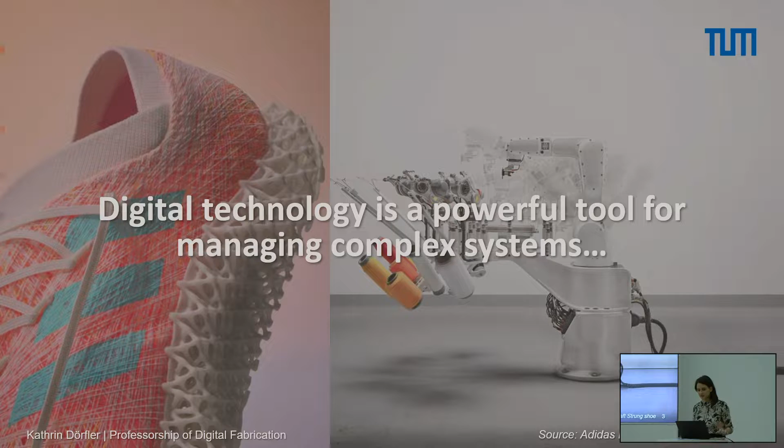So as you all know, digital technology is a powerful tool for managing complex systems. And in particular, the construction sector is often compared to other types of manufacturing industries, first and foremost the automotive sector or retail product sector. Often it is said that the production chain from design to final assembly is largely automated today, in contrast to construction. However, we believe that construction is not directly comparable to the classical manufacturing industries.

The built environment is intertwined with the material reality of the society, the geographic location to which it belongs, and it is a product of mostly its legal framework conditions, its regional availability and the supply chains, and also the industrial practices, skills, and technologies that are associated with it. So to enable a sustainable change in the construction industry, we need novel systemic approaches and also transformative technologies that come within the construction logics to become better and more sustainable.

So against this backdrop, this presentation and the work with my team advocates for this sort of holistic approach, emphasizing the need for digital construction that is somewhat robust and can withstand uncertainties, is in some sense also redundant and resilient to adapt to changing conditions. What I mean with this, I think it's best explained on behalf of a series of case studies, experimentations, and explorations. There will be 6 of them, so please be a bit patient. I will try to be in time.

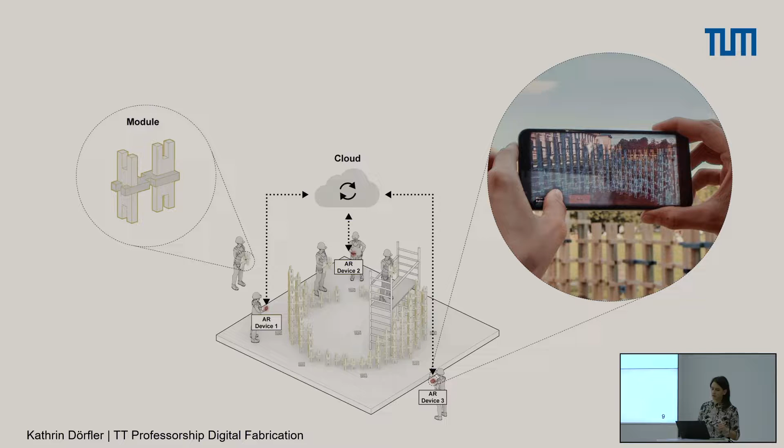And the research question revolves around how multiple participants or users can be synchronized and coordinated over a cloud, and how participants can intuitively log in, participate, and log out at any time of the process. For this, we developed a material system consisting of these discrete wooden blocks that offer form-fitting connections, and it makes it possible to use these units both as building blocks, as structural members, but also as sort of temporary support to build up the structure and then remove it again once the structure reaches sufficient

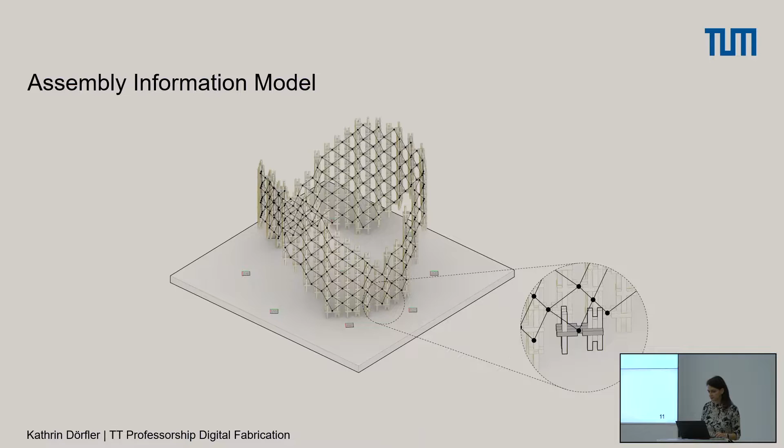stability. All of this is stored in an assembly information model, a graph data structure, where each of these blocks is represented by a node of the structure, but also by the topology, basically representing all the dependencies of these building blocks, and actually no sequences, but just dependencies. And this allows to continuously compute the states of other nodes according to the currently assigned states. I will explain this in a bit more detail.

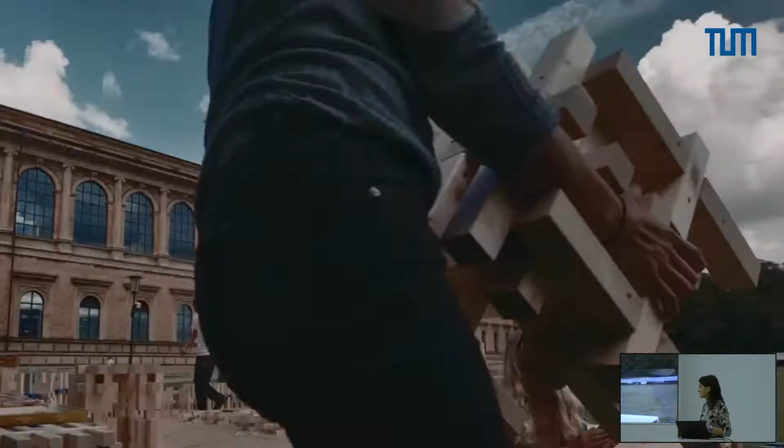So we built up this pavilion in front of the Pinakothek in Munich. This was during COVID time, so everything had to be sort of closed up. And you can see here the user interface, so it's all running on Unity on a mobile phone. And basically we had 4 of these phones, and each phone was used by a pair of students, so always 2 students that would work together. And one is basically holding the phone and talking to the other student, basically reading the instructions.

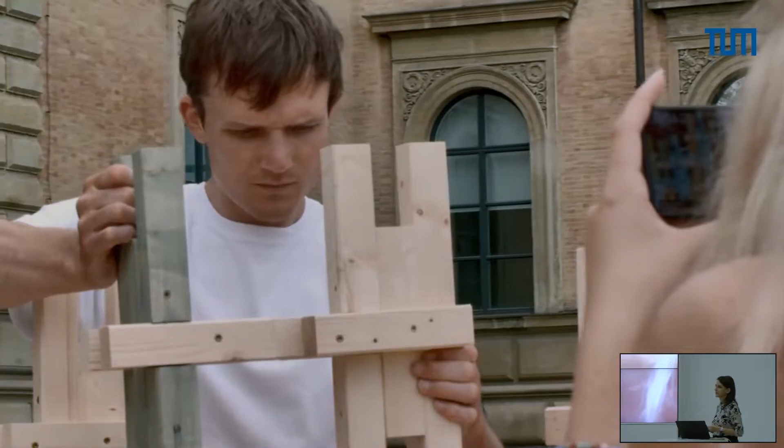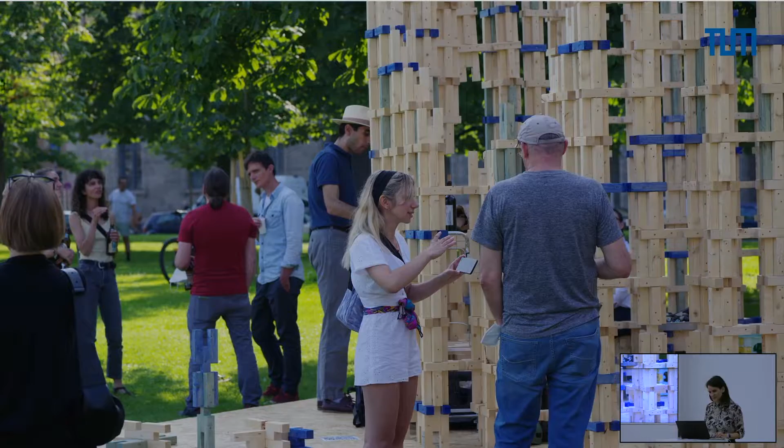You can see here that we use some sort of color coding, resembling whether an element can be built or should be built, whether one is selected by another participating user, or if it's removable, meaning that it can be removed again. And by this, we built up this pavilion as a sort of installation for this Kunstareal festival, and this is just the remaining building. The module itself is, of course, reusable, so there are no mechanical connectors, so we took it apart and rebuilt it at the Innenhof of our professorship. So these are some images from the installation.

And this work was, I mean, it's very simple, but it was still showing some directions what it means if multiple agents can participate together. And we try to expand this by bringing robots back into the system, so that we still work with mobile AR, but collaborating with collaborative robots. And this is a work that I have been developing with Daniela Mitterberger for a while already, and 2 of her MAS students this summer. Human-robot cooperative assembly of reconfigurable reciprocal frame structures.

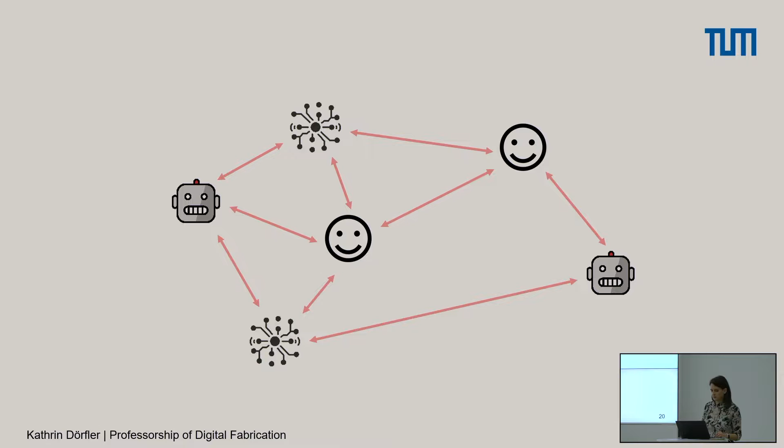It aims to foster collaborative ecosystems where humans and robots can complement each other, and tries to understand the limitations, but also the opportunities in human-robot collaboration, highlighting that this has to be considered in design, but also during fabrication. So we have seen exciting research that looked into multi-robot assembly and shows the effectiveness of collaboration among multiple agents, such that more can be accomplished than with just one participating agent. And the question is if also humans become part of these processes, if even more could be enabled. For instance, that we can take advantage of human cognitive abilities, versatility, fine motor skills, plus the robot's precision and endurance.

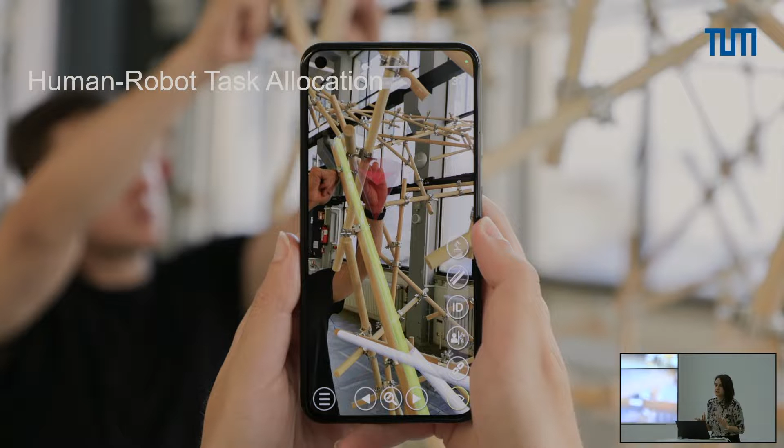We think this sort of thinking also has to be reflected in the design of the building structure. So we have to think, how can we meaningfully distribute tasks between humans and robots? Like, what can everybody do best, so that they can support each other in the best way? So this has to be considered during design, and then during building, of course, we have to find a way how these two entities can communicate with each other. So the mobile phone is always for us a way to visualize 3D data in 3D space at the correct time, at the correct place, and therefore allows to have a shared digital space that both humans and robots can share.

Again, in relation to this concept, we have basically developed some sort of assembly logics that would allow to examine this concept. And we have been building up on the basis of this reciprocal frame structure, where we always have modules of 3 that grow along a guiding surface.

During this growth algorithm, we already take into account - you can see here very lightly colored - the robot reachability, which should ensure fabricatability at each time, and the guiding surface, which basically also guides the growth algorithm. With this, we design already with the constraints, meaning the fabricatability is ensured at each step, so it's not a post-processing step but actually part of the design generation. The structural stability should also be ensured at all times.

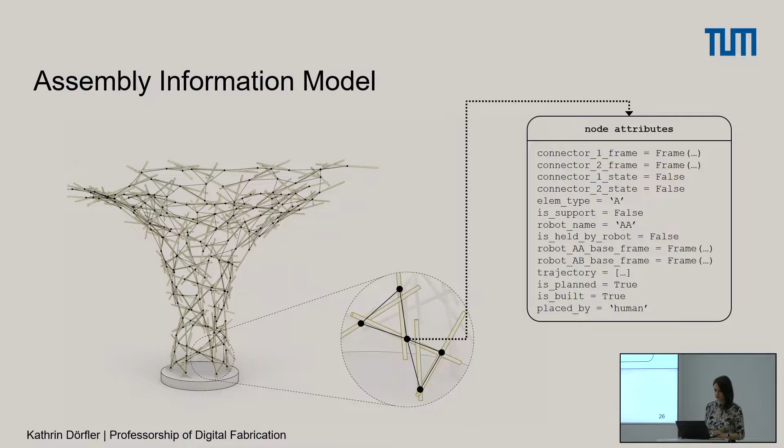Again, we work with this graph-based storing method, where the states, the geometry, the topology are stored in the model, allowing us to store all the fabrication data that is necessary, and also whether it's built by a person or by a robot, and all the data associated with it.

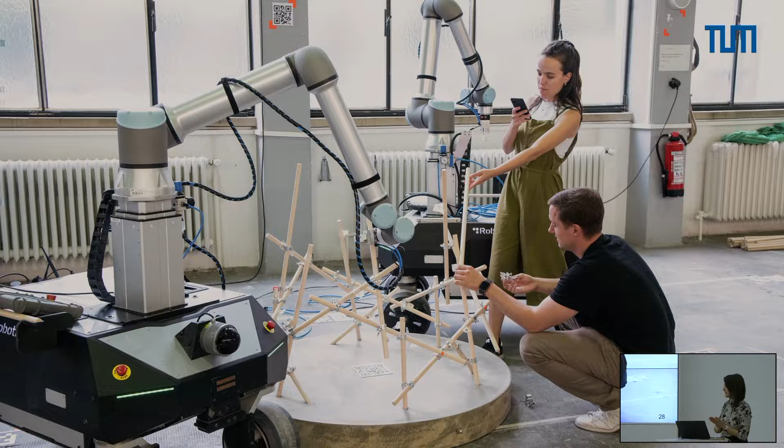Then Eleni and Joe joined by developing this nice AR interface. This was this summer, and I'll show you quickly a video that we tried to do, because it's always a bit difficult to communicate.

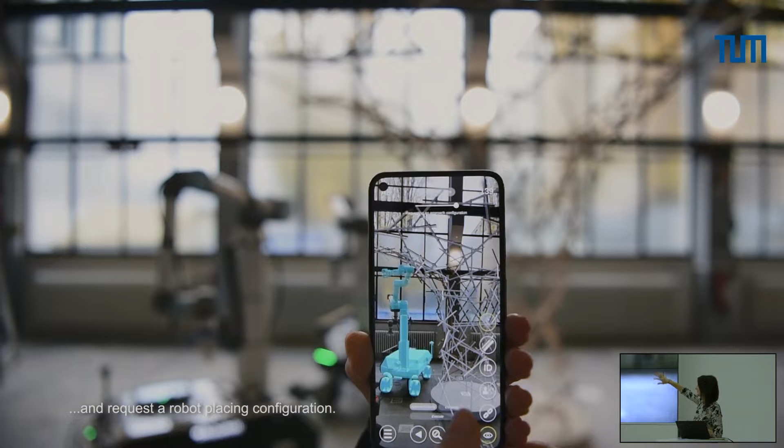This is basically the overlay of the AR app, and here you can see - you can hardly see, but - basically you select an element that needs to be built, and then you can trigger from the mobile phone the calculation of a trajectory for placing a new rod.

Then you can also visualize how this manipulation procedure is performed with this sliding you can see here, and then you can also trigger when the robot has to place the rod.

Once the robot has placed it, the person comes in and assembles the second rod, so it also has to follow some logic. While the first robot stabilizes the structure, the second continues - it's always like turn taking. The robot is basically also used as a temporary support, and then the second can continue.

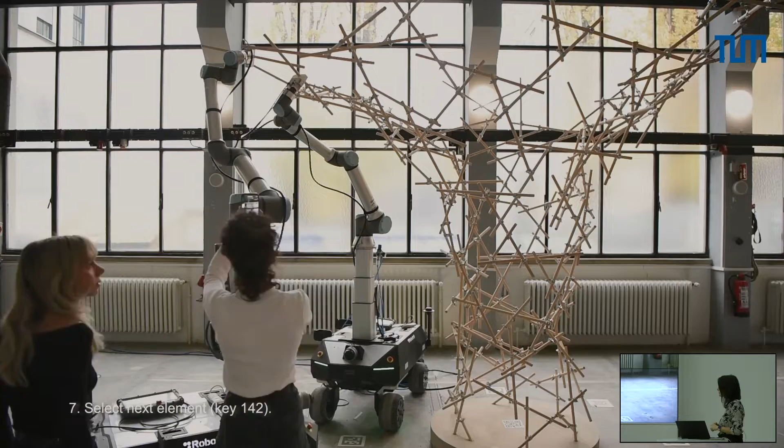You can see here also the interface. We have just worked with tags this time, so there's no object recognition.

And you can already see the limitations of this also - we would actually require much more spatial awareness in order to really make this very fluid and intuitive. The research we have been doing for a while, also together with Daniela, really shows that if we don't have the best spatial awareness, we will always have limitations in really making this kind of shared workspace very intuitive and seamless.

Now you can see when the robot lets go, the structure shakes because it's also a bit soft. Then in theory, the next rod could be assembled.

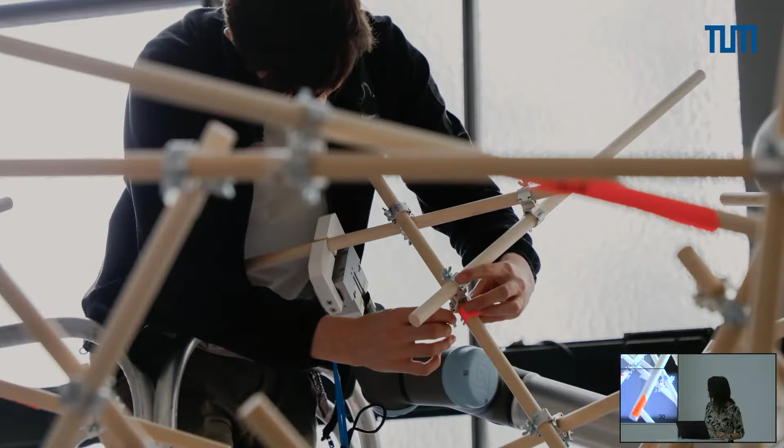So here are just some images. What is nice is that since the robot is collaborative, it really is used as a sort of smart drill - since we are working with these tools, it becomes very easily accessible to perform such tasks together.

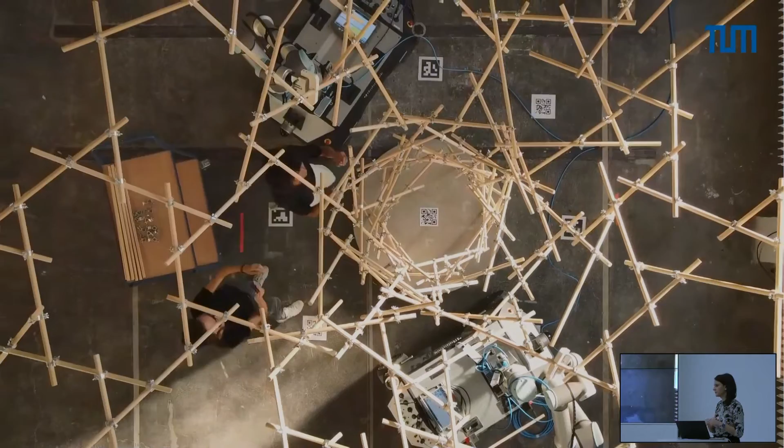This is just - I think Joe did the drone imaging, yeah, exactly - just to see a little bit also the scale. I forgot to say that all the nodes are the same, so this structure is completely reconfigurable, so we could disassemble it and assemble it again.

So this topic of spatial awareness keeps following us all the time. We have now initiated a collaboration with Professor Stefan Leutenegger on machine learning and robotics, to more fundamentally go into this topic of spatial awareness to support on-site construction or mobile construction. Spatial AI - big name - refers basically to the artificial intelligence that focuses on the understanding and utilization of spatial information with high precision, enabling robot systems to comprehend and interact with the physical environment in a manner that mimics human spatial awareness.

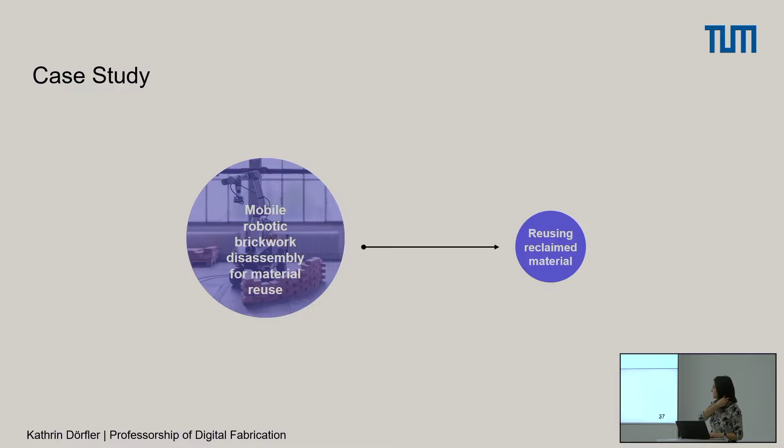And we have set up a case study with extremely simplified conditions, so no mortar, no additional complexities, let's say. But the objective was to realize an autonomous process for the robotic disassembly of a manually assembled brick wall with no CAD geometry and no prior knowledge.

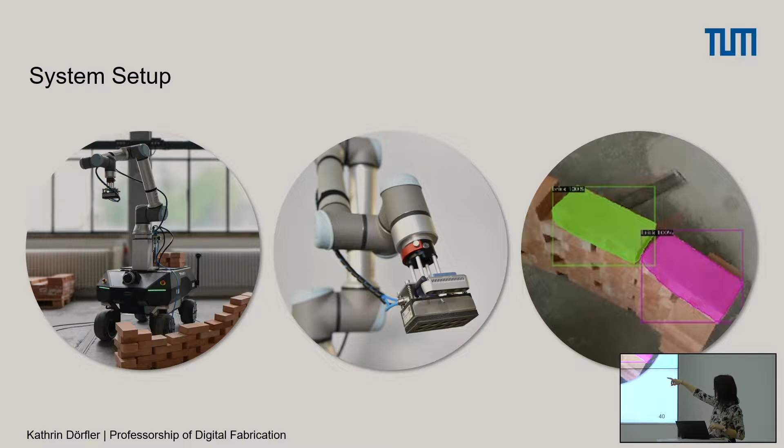We have started to train models with synthetic bricks, not real bricks, in a lot of different situations with a lot of different lighting conditions, such that both a full structure can be recognized, but also the individual objects within. And we've integrated this again into our mobile robot. You can see here the camera, stereo vision, and then what the robot can actually see.

And we have set up a two-step task management system. First, a search routine to identify the workpiece in general, and then an iterative loop to start to disassemble the whole system.

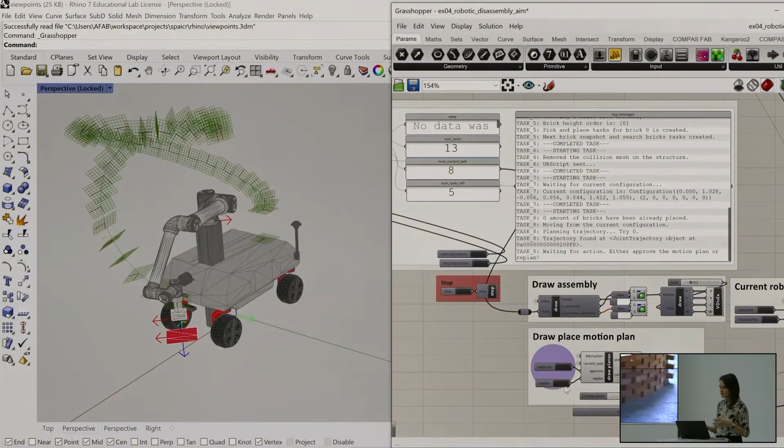And then we compare it to a digital model that we set up as the disassembly progresses. Each brick in reach, or each detected object in reach, is then taken off. So you can see here that the digital model is generated as the disassembly progresses.

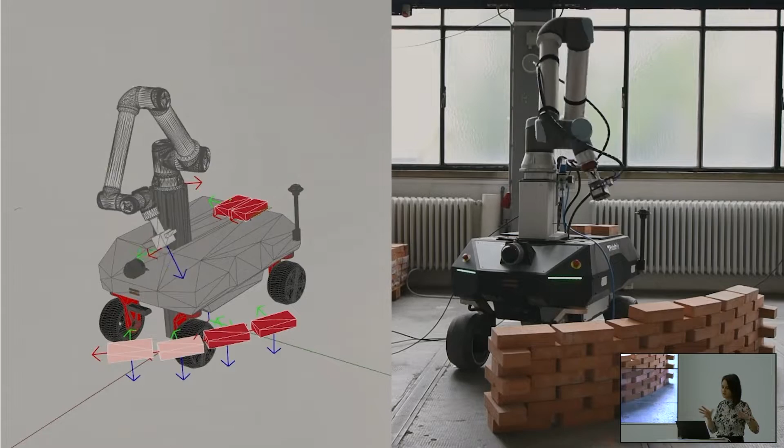And basically the routine is always the same. The robot looks at the structure, it takes one of the detected bricks, if there are multiple, plans the trajectory for putting it back on the storage, which we have now put on the back of the robot, and then continues with this routine until no more objects can be taken out.

And you can see here the digital twin, and this would be the first patch that it would disassemble. You can also see that it goes in the opposite way as you would do when building it up. So it goes patch-wise with these kind of trapezoidal shapes down.

Then we relocate the robot manually, so there's no autonomy in there, and we use a tag to put everything into the same workspace globally, because locally this information is not important. For the disassembly routine, this is not as important. So we go, in this case, 5 times to basically take this whole structure apart.

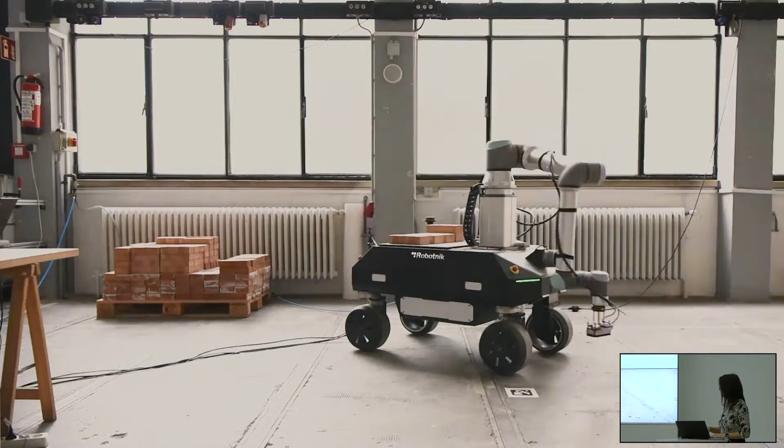And what is nice is that you create a digital model during the disassembly, and you could basically reconstruct it in the same way, which is somehow nice. Of course, not super accurate to the extent that would be required, but if we can tweak this, this would be a nice way to think also into reconstruction again.

You can see here the 5 patches. So while it's not super accurate, it's super robust somehow. We had 100% task success rate with these 48 bricks and 5 times relocating.

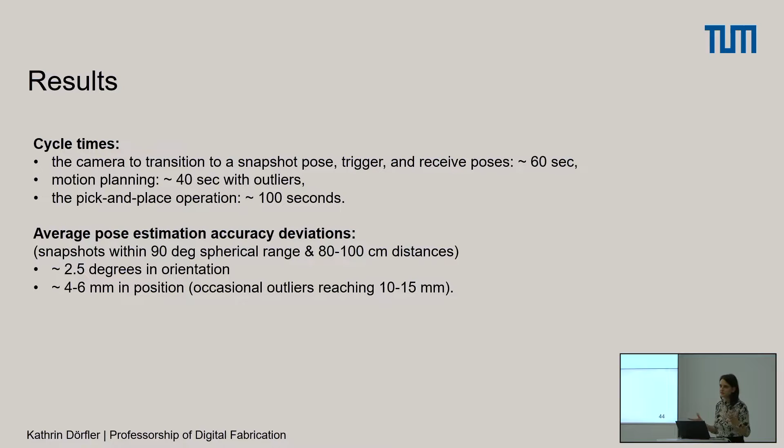Here are some of the numbers that quantify a little bit of the cycle times and the pose estimation of the single bricks. We would now need to measure it a bit more precisely to really make some better assumptions on the accuracy of what we can achieve.

So while we are very invested in developing these technologies, we are also very invested in working with architecture students and really bringing these technologies into the design sphere. And this is also very much connected to this additive manufacturing and construction cluster.

We have initiated 2 pilot projects in the last 2 years where we set up design studios where we work together with students on architectural design topics. The focus is on design, not only in terms of what is built, but also how the whole process is performed, leveraging additive manufacturing technologies as a design driver. In the classical way, you design, then you engineer, then you construct, but we try to see this in a coherent, early stage design that brings all these topics together.

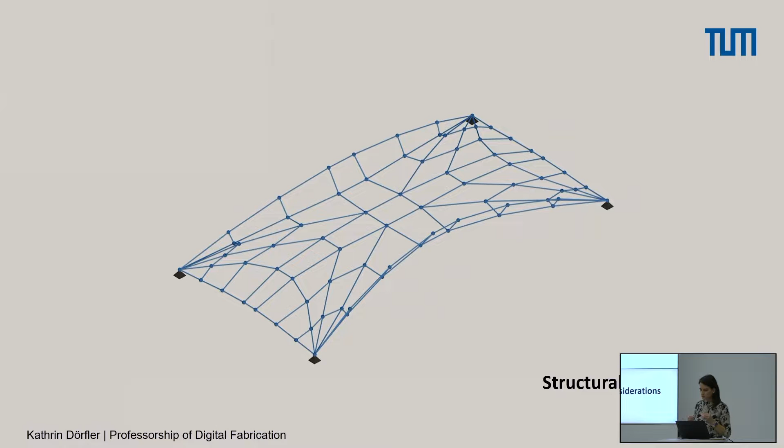In structural design, the functions we want to integrate are always related to form, force, and the material or production technology. You can see here a spanning structure for a pedestrian bridge that first takes into account the mechanical properties of the material, and then in a second step, the limitations of the printing system, so that the form is discretized into parts that can be 3D printed.

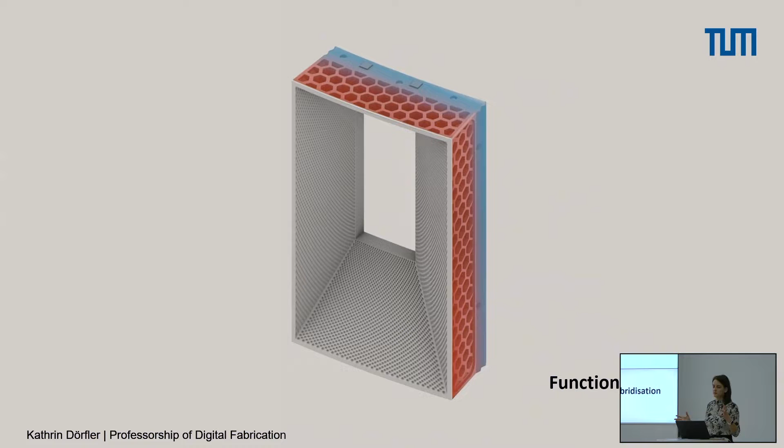In building construction, this goes far beyond form and force, but includes an extended functional hybridization. We try to integrate multiple functions, relating to structural, thermal, climatic, and building design requirements into the building components, all enabled by additive manufacturing or digital building fabrication technologies.

I'll browse through 3 projects quite fast. The first one, Bridge the Gap, was a design studio I did together with Pierluigi D'Acunto, professor for structural design, 2 years ago, in which we aimed to explore the integration of form, force, and fabrication technology as a main design driver in the design process.

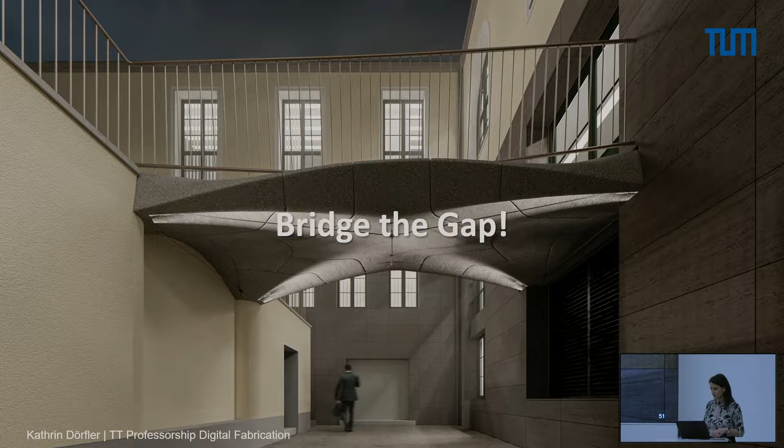For this particular design, we focused on a method called selective paste intrusion, where a cement-based, or actually any kind of binder, is intruded into a gravel bed, and then layer-wise you build up a structure. These structures are not reinforced, so they're very brittle. In particular, in this case, we used a lightweight aggregate, meaning the mechanical properties of the material are quite weak. However, you can react to that with geometry, with geometric design.

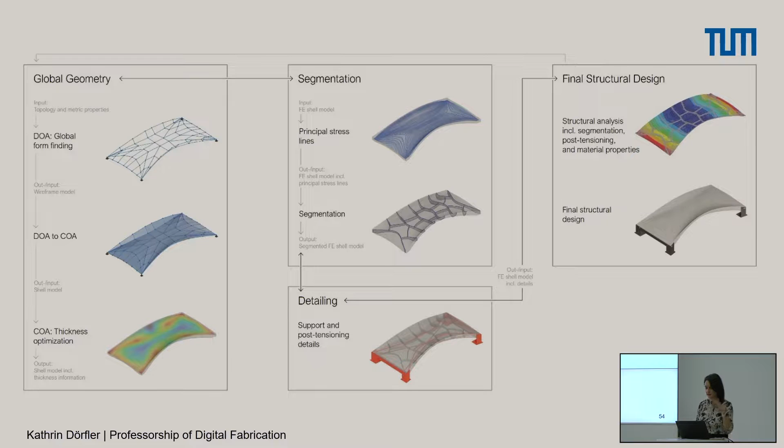Knowing this, you can take these features very early into the design thinking, in this case to set up a model for a compression-dominant load shape. We developed a method to go sequentially: first a very rough outline on the global geometry, then more detailed segmentation, then the final structural design. We were able to realize this within the additive manufacturing AMC cluster as a one-to-one prototype, and this video guides you through it.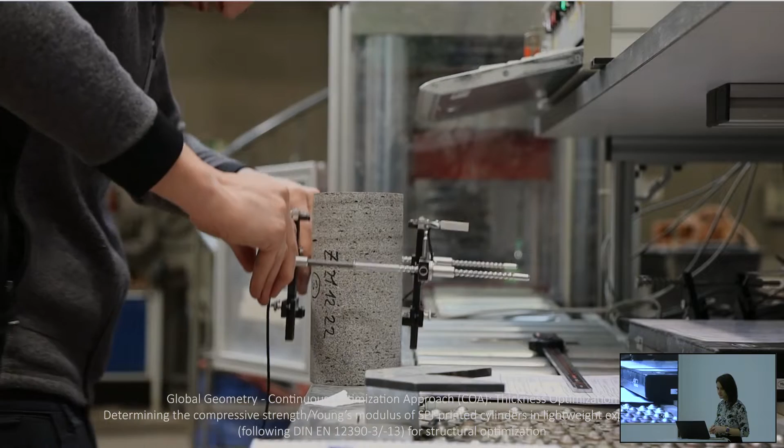You can see here again the design method. First, because it's a sort of unreinforced system with post-tensioning cables, it takes into account that we want to go into the arch-like or shell-like shape. Then the mechanical properties need to be tested and fed back to the material model. Which type of aggregate you use really defines the mechanical properties. We looked into taking a very weak material with very low cement paste, but making it a bit more bulky so we have more interface between the parts.

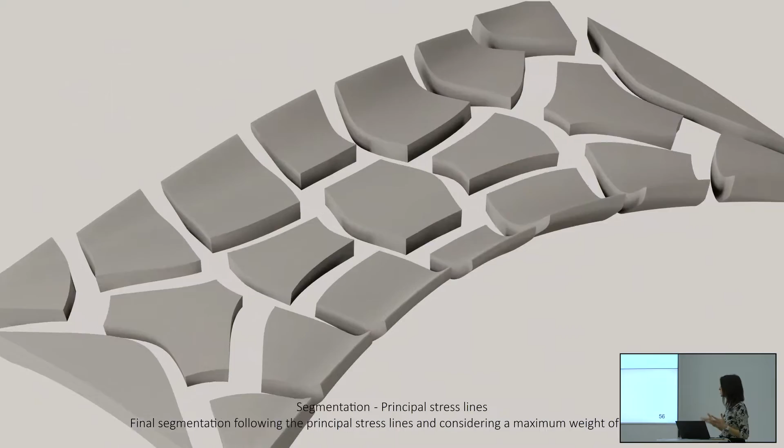It follows the stress lines, and this is not automated, so we did this all manually. It follows the stress lines and integrates the detailing of how these parts come together into the 3D printed parts. This is the post-tension cables, how they are routed through the structure. Because we didn't want any lateral loads in the supports, there are also cables that hold the supports together.

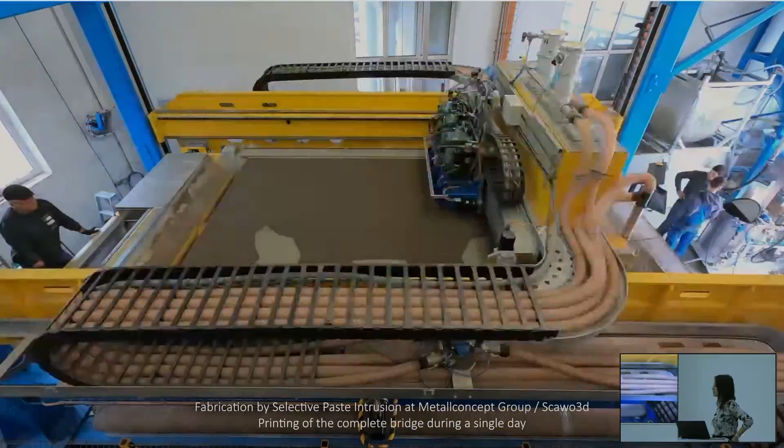This is the 3D printer. It's an industry partner in South Tyrol who developed this printer together with TUM, which is about 6 by 3 by 2 meters. The segments can be printed in one go, which is nice, and it's a very robust process because you can very easily remove the gravel bed afterwards.

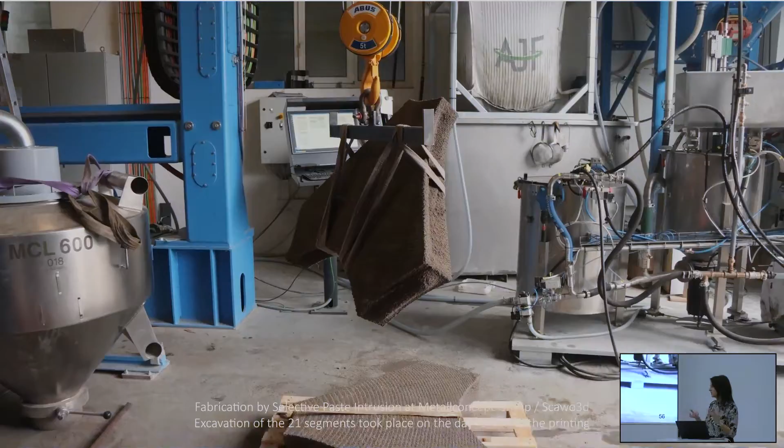And then here you can see the not very smart way of assembling—a lot of support needed, but something that we would need to look into in a later stage.

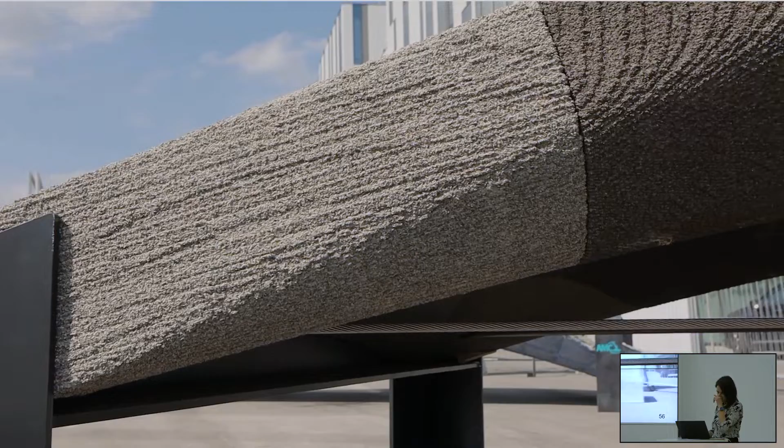And what is super nice is that there's no mortar needed between the parts because it's so precise, and also the connections are form fit. Yeah.

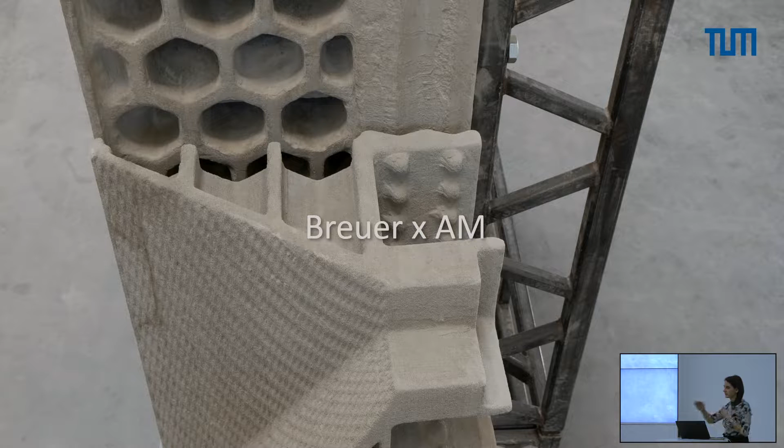While this very much looked into the structural capacities of the system, when we look into really creating building components, the climate functions or the insulating functions must be taken into account, both for the indoor climate and the outdoor climate. And so we have started to look into building systems. In this case, the architectural reference of Marcel Breuer, prefabricated facade systems from the 60s, and a method for the design and manufacturing of this augmented with the possibilities of additive manufacturing.

So in traditional industrial construction, we always have a load-bearing layer, an insulating layer, a protection layer. This is done, of course, to comply with the codes and to react to all of the requirements that we have. But this multi-layered nature also means that once we deconstruct the building, it's very difficult to dismantle. Usually these layers are glued to each other, and we want to use as little material as possible for doing that, and also not so many processes.

This has already been thought out in this reference. This IBM Research Center in La Gaude in France aimed to unify building technology installations and passive solar protection measures in a single modular prefabricated facade component, but of course limited by the casting techniques of the time.

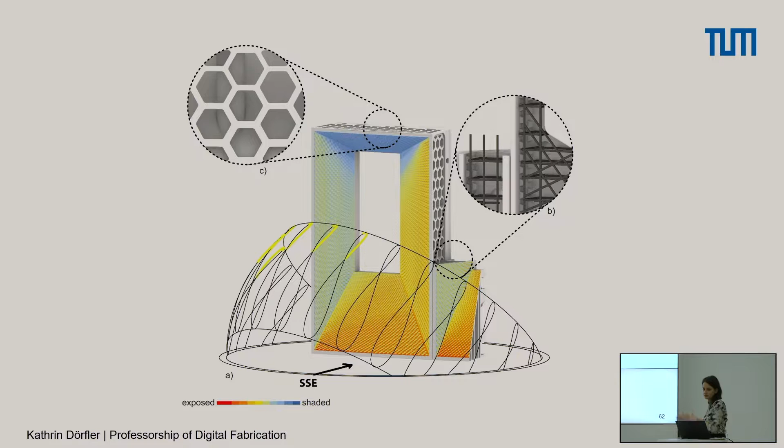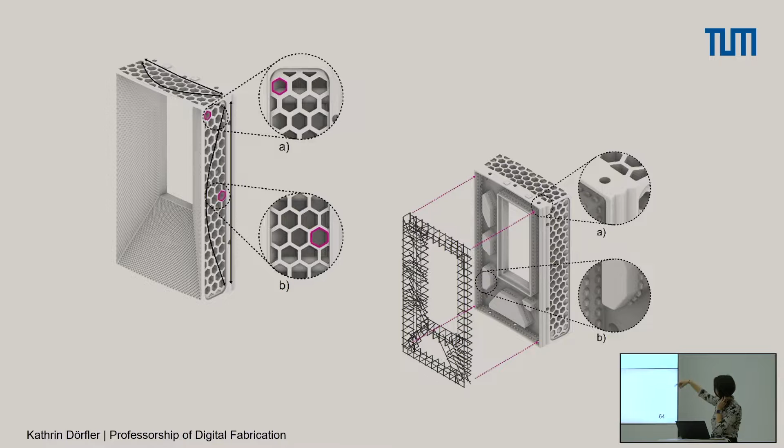So we tried to develop a design methodology to integrate both the insulating functions and the load-bearing functions into these prefabricated building components, where we made a hypothetical design. You can see that we first parametrically adapt the size of the glazing area to the solar situation of this circular building layout. It's a hypothetical design, not a real building. And concurrently we design the internal structure to conform with the thermal insulation, and the structural zone to conform with the structural requirements.

And I will also play a quick video of this one. No, it doesn't seem to play. Quickly look.

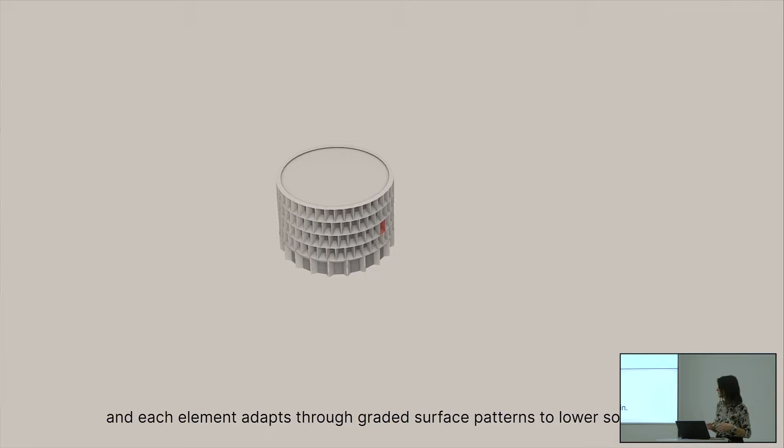So this is again a one print bed endeavor. Now this is not discretized, it's really printed as one piece, 3 meters high, so it's really large. And of course we had to deal with all the cracking and the deformations. And the constraints of the fabrication system are also reflected in how the details are made. These channels have to have a certain size because it's really difficult to take out the cement powder, so they are much larger than they would need to be.

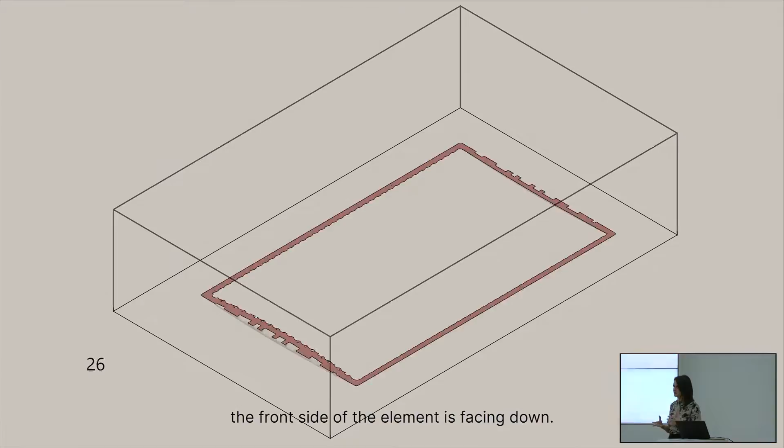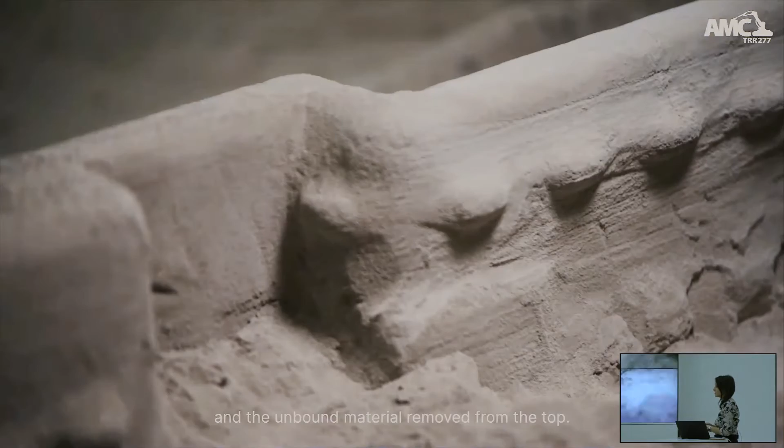And since the material is less load-bearing than the process I showed before, we had to integrate it as a stay-in-place formwork, to then put in reinforcement and cast parts of it for the structural zone. It's printed in a horizontal way. It's taken out and the powder has to be removed. That's much more difficult than in the process you saw before, because the powder is more sticky and not so easy to take out.

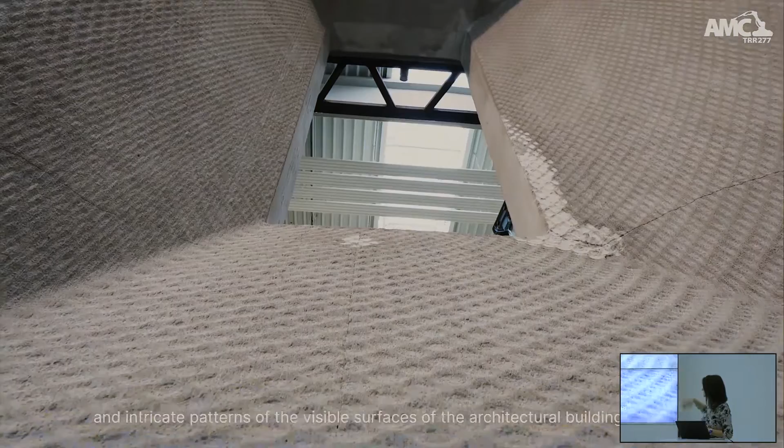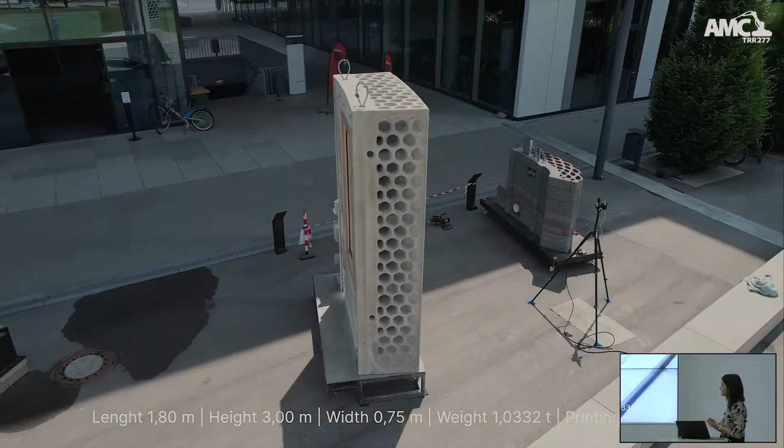Then you can see here how these channels are filled with the reinforcement and the cast concrete. So it still doesn't really conform with what I said before, that you just use one material. And here you can also see little cracks. Still, it was a major achievement that we managed to realize this at that scale. Then again, here the insulation material was blown in from the side. And here the doctoral students took some measurements of the surface temperature of the component.

And you can see here also some of the parts where the cracks have taken over. So we have to try it because we like the concept. In principle, we have now tried to go back to the other process and rethink how we can stage it really with one material.

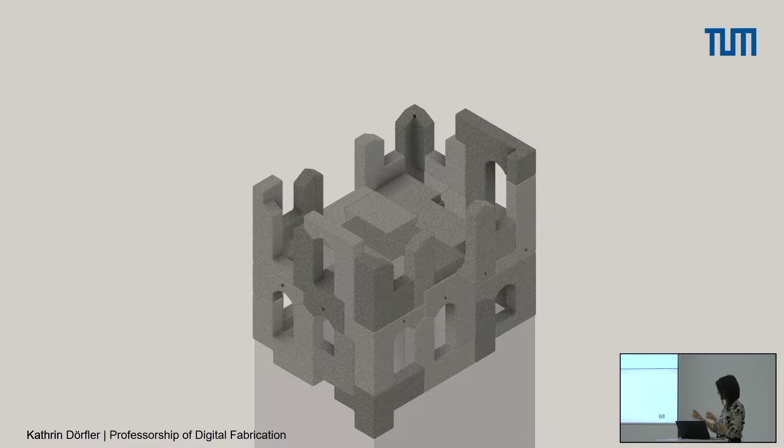And we have looked back into this selective binder intrusion, starting from this concept that you really can construct a building with just one process, one material, both for the wall elements and for the ceiling elements, envisioning how the components could be prefabricated and then put together into one building without reinforcement, but maybe potentially again with post-tensioning methods. And this really draws the inspiration from ancient stone masonry architecture, but with the ability to really have a hollow stone.

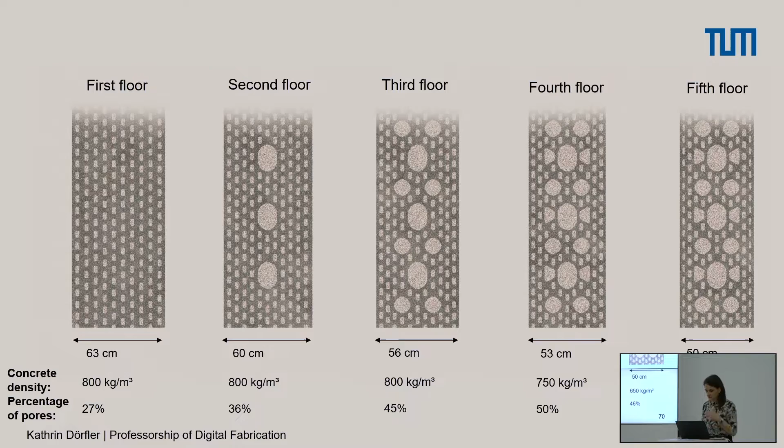So what is inside these elements has all of the functions that I've been talking about before. The shape of these components first reacts to the size of the printer, then to the statical requirements, so this compression-dominant load transfer, then also how these pieces are assembled. If you assemble from top, you want to have the segmentation lines tilted, and also such that they can interlock nicely so that you don't need any more mechanical connectors.

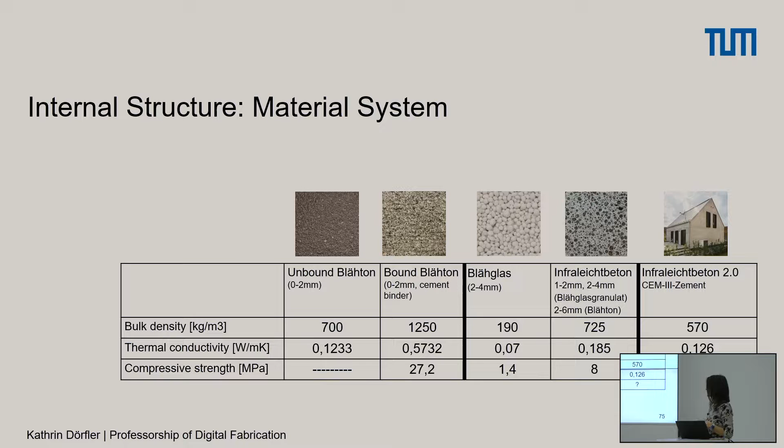And what is really nice about this is that it goes very close to Infraleichtbeton, or Leichtlehm. These two things are in the same field. The binder, whether this is cement or any other binder, is the load-bearing component, and the particle itself is a lightweight aggregate, which is highly insulating. If you selectively bind the material, the particles which are trapped inside such closed cell geometries remain in the structure, both as an insulating component, but also with a little bit of thermal mass.

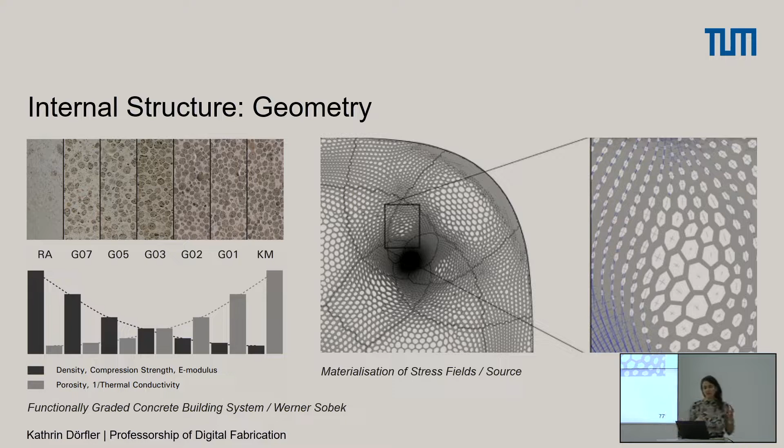What we refer to as this trapped particle principle: the more you bind in the system, the more it carries, but the less you bind, the more it's insulating. So with that knowledge, we can steer the internal geometry of these parts. And we have now made the first prototype of this, which is just a very small cutout, because we have just started this research, but with some promising results.

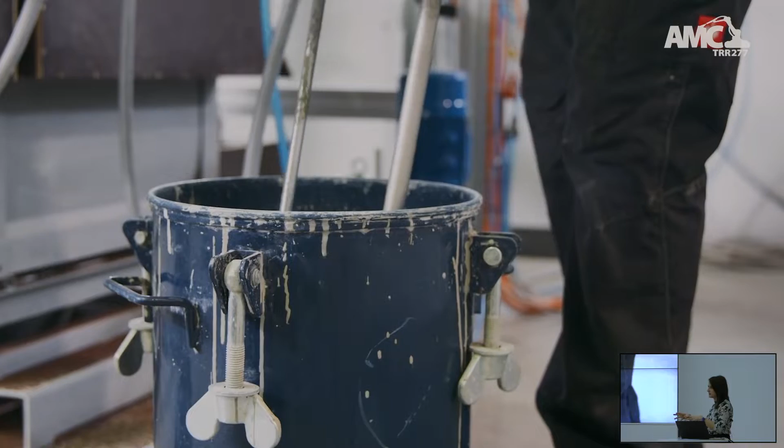Here also the process of printing is detailed a bit better. This binder is super liquid, and it goes into a print head that makes droplets of material, like a printer, like a Strahldrucker. You can see here that the flow behavior of the cement base is super liquid, because it has to intrude the material a little bit, and it also cannot harden so fast, so that it doesn't give cold joints. We know all of these issues.

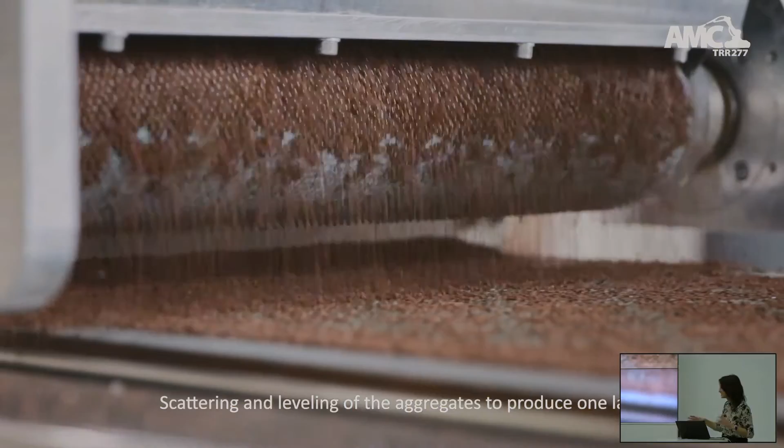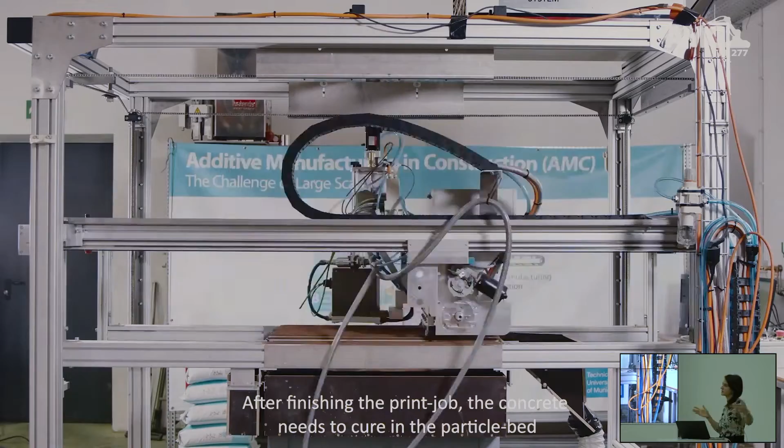And then here you can see how the gravel is put into the aggregate container, and this agitation container that stirs the binder. And then just press print, which never works, but say so. And then you can see how the gravel is distributed on the bed, layer-wise manufacturing the part. This is the small version of the bigger one that we saw before, the first prototype that we have in the material science lab.

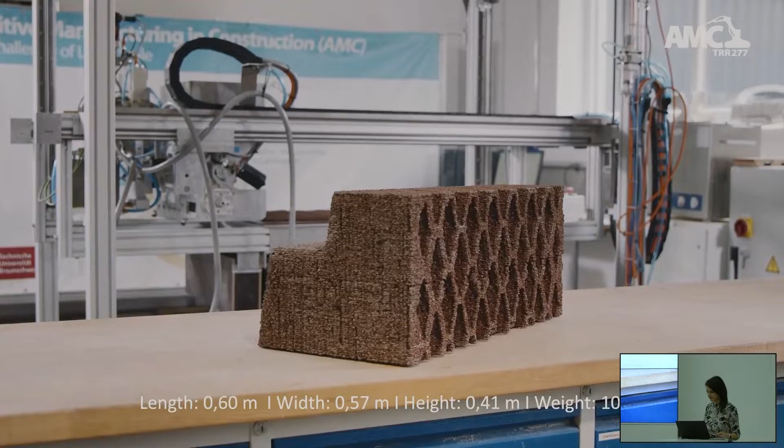And then you can see again how easy it is to remove the gravel around it. You can see here this was the size that we have first produced, and we are now in the process of taking measurements to see if the simulation fits the assumptions. And this is just a photograph of this internal cell structure.

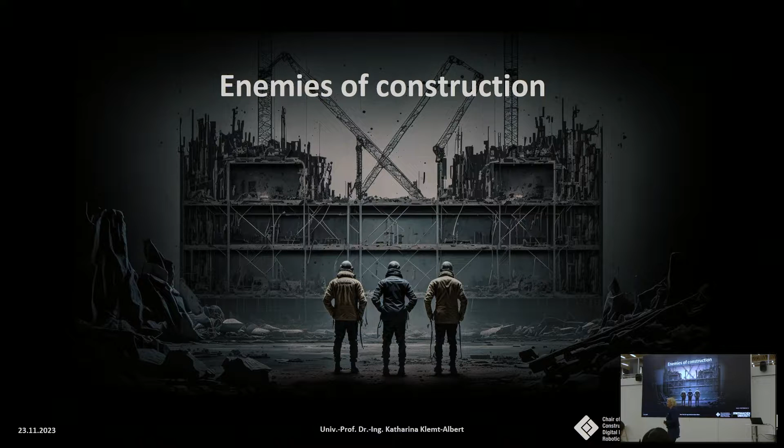I want to talk about sustainable digitalization in infrastructure and construction and give you a small, perhaps also German perspective, what is going on from the governmental side in Germany, and how we can catch up from the research and scientific part. So what are the enemies of construction? First of all, it's sustainability. From construction, we owe like 38% of the CO2 footprint. This is true for the construction itself, but also for maintaining our built environment.

This, of course, is a hard word. But on the other hand, we do have a huge possibility. If we change something in construction, we will have a big impact also on the CO2 and on the climate. So first, sustainability. Second, productivity. If you look at the productivity, this is the statistics from Germany, but it's pretty much the same for the US, so it might be the same in Switzerland as well.

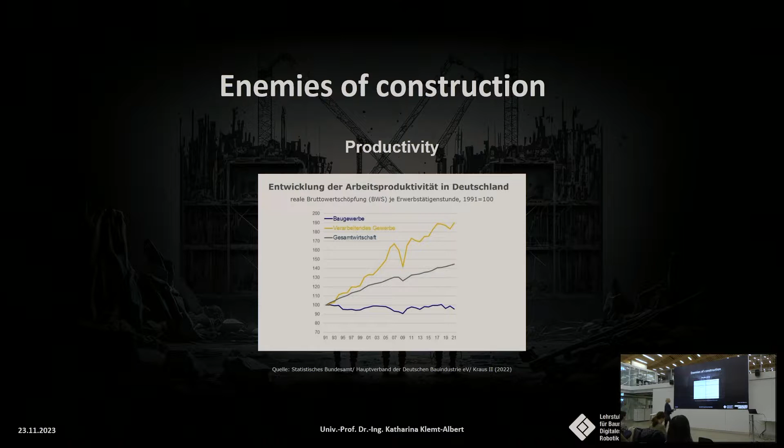This is combined now with the lack of workforces, which is of course very true for all of our industrial countries, but especially for the branches of food, so restaurants and so on, and construction again. So with the lack of efficiency combined with the lack of workforces, we need to do something. I see these challenges here, lack in sustainability and efficiency and the lack of skilled personnel, plus, well, I know some projects which don't meet the time and budget goals at the end. Perhaps not your projects, but we all know some of them. So we need a solution for that.

And I think digitalization is key. We need a very consistent digitalization at this point. Otherwise, we won't cope and we can't face these challenges in construction. So if we look now at what is going on, I promised to talk a little bit about Germany. How does Germany reach sustainable digitalization in buildings and also in infrastructure? What are the initiatives from the governmental side here?

First of all, there are lots of master plans in charge at the moment. These are a couple of them focusing on infrastructure, like traffic infrastructure. You have a master plan, for example, for federal highways, and also one for road and bridge construction at the state level. This, for example, is from Bavaria. They all say that for new projects, we have to implement building information modeling. I think you are aware of this. So for the new projects, where we start the new design, we will have at the end a building information model, so a digital model.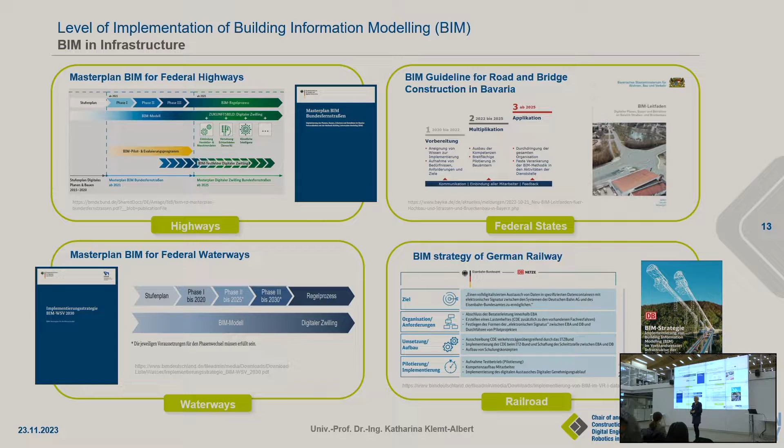So the same is true if we look at the federal level in Germany for, let's say, buildings. So for example, there's a master plan BIM for federal buildings. I know it quite well because I had the chance to write it. So I really suggested there that we set a goal to implement obligatory building information modeling. And this is already done now.

But still, most of our buildings are existing buildings. So if we start now to get building information models with the new ones, we don't have them for the whole infrastructure at the moment. And it will, let's say, take years and decades to get them for all the existing buildings. So we need different solutions for that.

Plus we have different, I'll say, challenges also with respect to affordable housing, for example, in Germany. So there's a governmental goal to build 400,000 affordable housing units every year. And we were thinking at a round table about that. How can we fulfill this? Because it should be affordable and it should be sustainable.

And the approach here, for example, was to tender a big framework agreement at a federal level. And there were 20 companies now getting this tender. So every city and every commune in Germany can now take this tender proposition and get something like serial and modular construction, so that we have more of a scale effect for these affordable housings. I think there's something ongoing at this point.

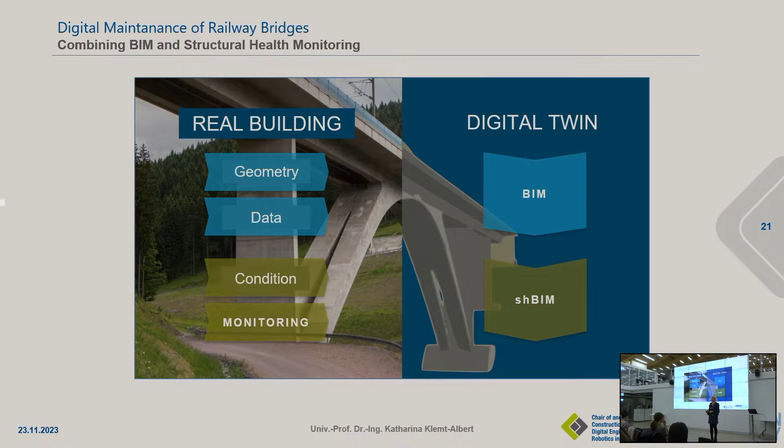So what we did in our project is called multi-data fusion. So we have the laser scan. We do it by drones and robots and so on. And then we have the existing plans evaluated by artificial intelligence. And then we combine it and put it together in a geometric model enhanced with the information, with the content data we get from the existing plans.

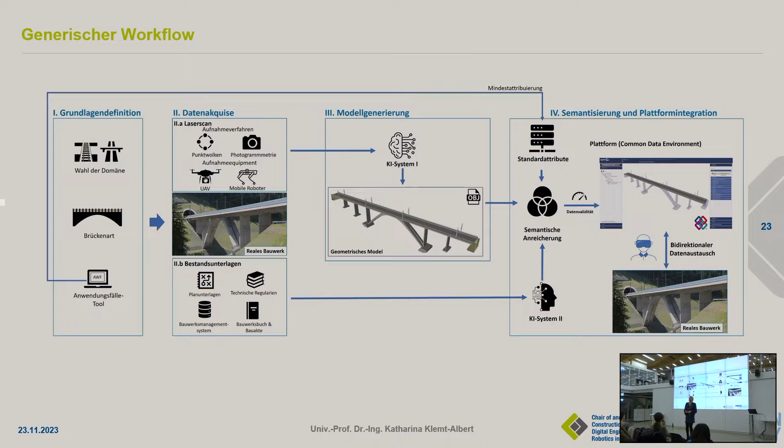And we get the monitoring data. Mostly, it's not really real time because we don't need every second, but it's like weekly data we can collect there. So we have the building data, and then we can combine it also with damage reports and so on. So with this multi-data fusion, we really have the whole bridge on the common data environment, enhanced with the current structure and the current health of the bridge itself.

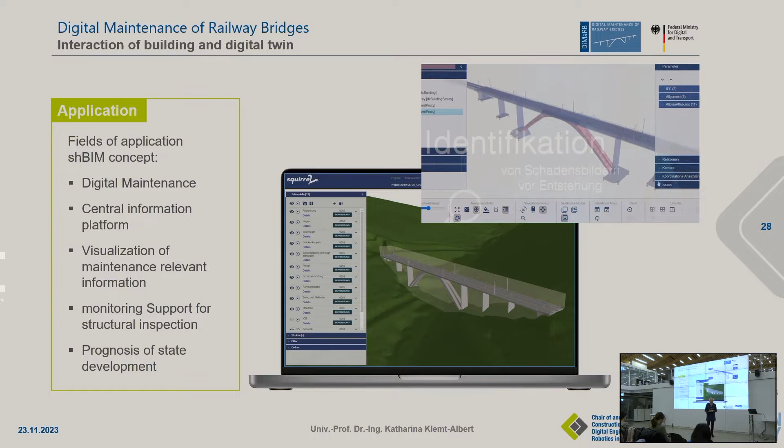And this data now goes to the predictive maintenance. So the one who is doing the maintenance itself can have a look at the bridge, and then he can see if there are like traffic lights. If it's green, then everything is fine. If it's yellow, he can look inside and really look at the data from the monitoring, for example. And if it's red, then he has to do something for the bridge.

So in this case, we really can optimize the process of maintenance and also use the bridge much longer than we could if we didn't do the monitoring at every site. So this project is already quite nice. We're looking also a little bit further to do the inspection on site, because also here we have a lack of personnel.

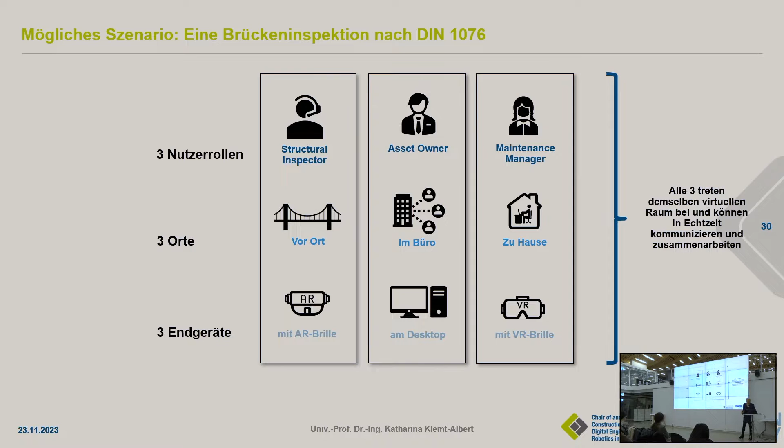So we have the structural inspector, we have the asset owner, the one who is owning the bridge, like the German railway, for example, and we have a manager of the maintenance, and we want to have them at different places. So we don't want everybody to have to go out to the bridge. The maintenance specialist, the owner of the bridge, should sit in his office, and there would be just one person at the site really looking at the bridge, and then perhaps another expert from another office. And what we are doing now with this digital model is to really do an inspection of the bridge while just one person is on site.

So next topic, how can we build with less CO2 output? If we look at concrete, of course it's a real problem, but on the other hand it's a very nice material. It has compressive strength and so on.

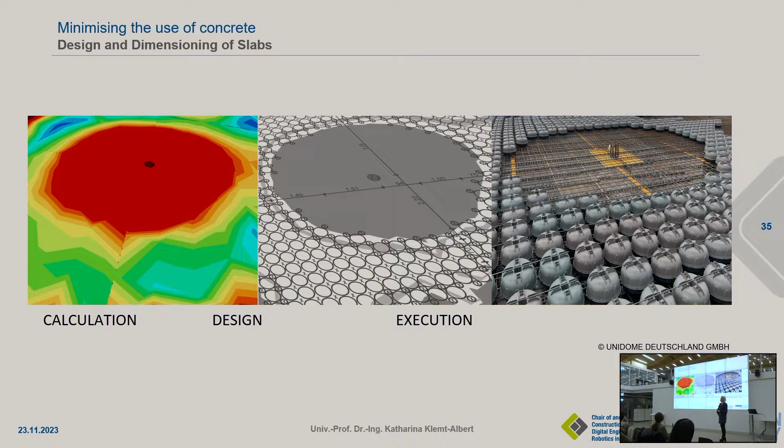So if you put these voids into it, you could reduce the whole concrete volume by 30%. This is nice because if you reduce it by 30% in the upper floor, the columns and floors below it would also need less material and less strength. So over the whole building, you can reduce everything.

So this is a nice approach, but why isn't it done? It's even cheaper than using the whole material there, because concrete is quite expensive. But the problem is that we don't have the people for the assembly at this point.

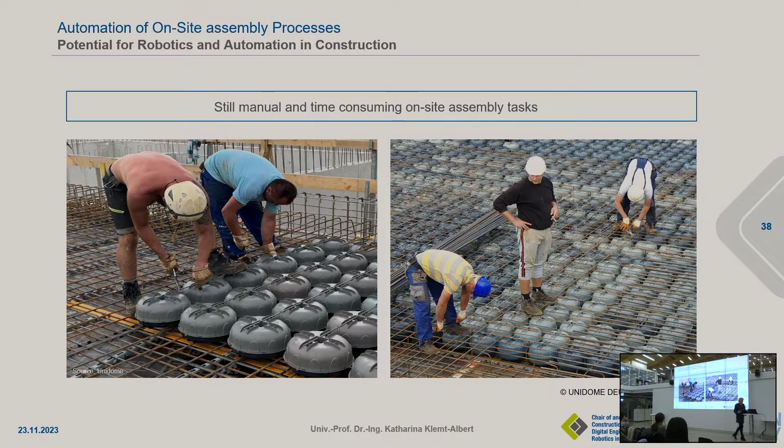These voids come in half parts, and you put them to the side and have to put them together into a whole holistic part. This is done with manual workforce. So this company, who are building with these voids, asked us if we could find something to do the assembly process by robots.

So the idea is really to go with a robot to the construction site and let it assemble these parts, and then install them in the construction process at the site, to get the reduction of concrete there.

So the last example from my side is a completely different one. It has nothing to do with realization and robotics, but with how we can get citizens more involved in construction processes and projects. We usually have the problem that with a new construction project, there are lots of people from the public who are reluctant in accepting these projects.

And we have very long spans until we get acceptance for these projects. There are even examples where, at the end, when starting the construction part, there was a lot of resentment against these projects.

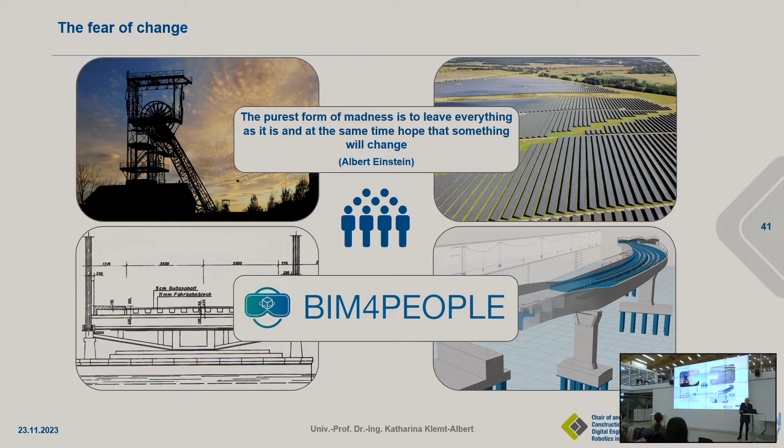So what we set up at this point is to do the whole visualization concept digitalized. We have the designers and planners with building information modeling, and then a BIM model as a single source of truth, and we want to use this visualization with augmented reality also for the public to participate in the project.

So we have several use cases defined: a visual conceptualization, then a modular design approach, and also a digital planning approval, so the whole approval process gets more digitalized.

This project just started at our institute, but we already see lots of interest, especially from the federal highways and also the German railway, because they say processes—I don't know if you're aware—but in Germany it's like processes of 1 year or sometimes 2 years until we get this approval.

And it's because we can't really involve the layman, because if we show them design plans, they don't understand it. But if we visualize, then we have a real possibility to reach them a little bit more clearly.

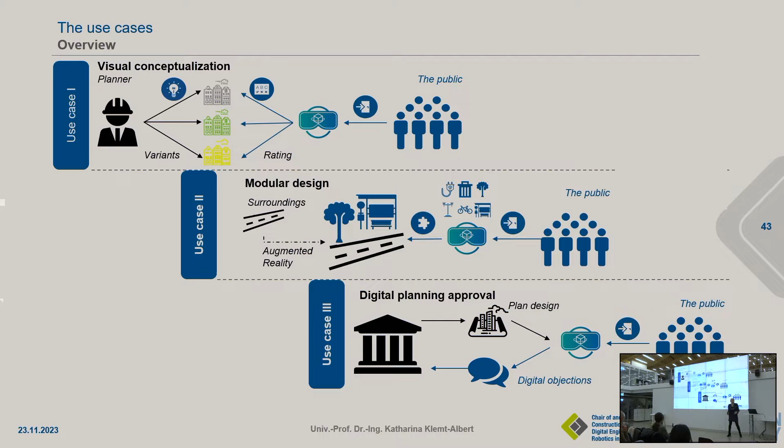So the question we are thinking about is how can we really reach construction, and how can we reach the construction industry? This is the goal of our institute, where we are looking: we focus on infrastructure and also building structures, and we try to enhance circular construction and tackle it also with automation processes.

But we are always looking at the digital transformation. We can't do digitalization and automation without the people. And construction industry is quite conservative at this point.

We can't reach it in the next moment. So what shall we do? What could we do? We could do a middle step here, an automation of sub-processes, to really look at which processes, especially those which are not very efficient, so where we need a lot of people, or which are not, and/or which are not safe.

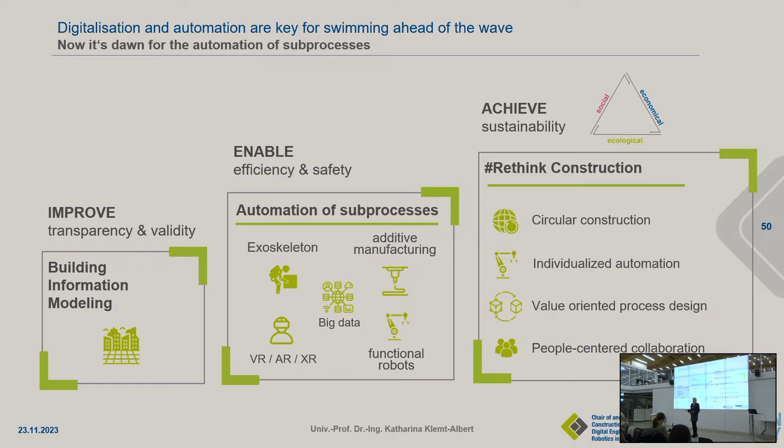So if they are either very hard work, or if they are in a big height, or with materials which are not nice with regard to health, we can look at these processes. And then we can have solutions which I call more like low-hanging fruits. So it mustn't be the 100% solution, but rather which part of the processes can we really automate here.

And here we can combine things like additive manufacturing, functional robots, extended reality, and combine it also with artificial intelligence approaches. And how can we find these processes, and how can we find industry?

So in Germany, we have a very small and medium-sized construction industry and lots of craftsmen also. And they face now that they don't have the people, so they have this lack in personnel. They say that we can't do our projects anymore because we don't have the people. So if I provide them a solution which is ready in 5 years, then they are not interested. But if I provide them a small solution, then they would be interested. But they say, what is automation? What is robotics? They don't know.

So we set up a robotics learning factory at our institute. And we have different, it's not like a production line, but it's rather like workstations there. So we have a workstation for additive manufacturing. We have one for extended reality. We show what can be done with big data and mobile robots, and also a functional robot. This is our Carla. And people from construction industry come to our learning factory, and they get hands-on workshops.

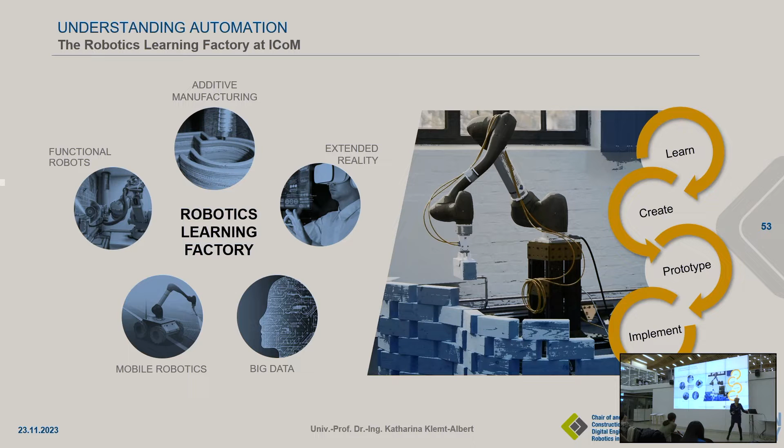So to give you some examples, this is a view of one of our workshops at the Institute. For example, here we have somebody working with an exoskeleton, which is automated also, and helps him to lift the things here. Then we have a platform robot, for example, which is finding its way itself. And we show just here what can be done there.

And of course, we can combine. So we could have the platform robot, and we can mount on it, for example, such a functional robot. And here's a guy who is just teaching, it's not so fluently at the moment, but he's just teaching here the robot to set these bricks. And this is the experience which they are doing there. And it's fascinating for us as well, but also for our industry partners.